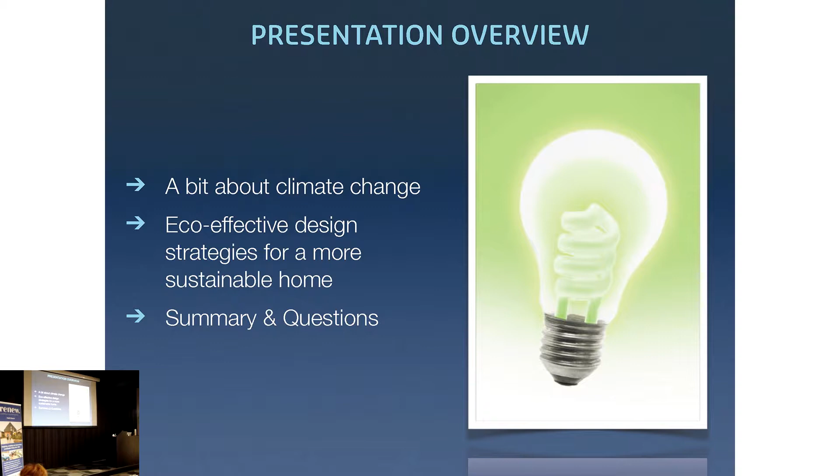Oh, microphone. Yeah, okay. This is like, I'm a man - I have to do two things with two different hands.

All right, this is everything you need to know about climate change in only 5 slides. Because we build really bad examples of this, we use too much of that, which then causes too much of this, which then does that, and then does this.

Here's a quote, a very brief history lesson: 'If our designs for private houses are to be correct, we must at the outset take note of the countries and the climates in which they are built.'

Does anyone know who said that? A famous architect - not that famous, no, kind of that famous. It was Marcus Vitruvius Pollio, who was a Roman architect. He wrote the oldest work that we have on the Western history of architecture, called the 10 Books of Architecture, and this, I think, was the opening paragraph of chapter 2 or something like that. So a lot of the stuff that Adrian and I will be talking about tonight isn't really anything new, and it's not really rocket science. It's just the stuff that we've maybe forgotten along the way, but if we go back to first principles and fundamentals, it can make a big difference to the way our houses perform in terms of their energy consumption and also in terms of their sustainability.

So these are the 6 eco-effective design principles that I've come up with over the years that I think cover most of the things that you need to do in order to get a more sustainable, more energy efficient build. It goes something a bit like this.

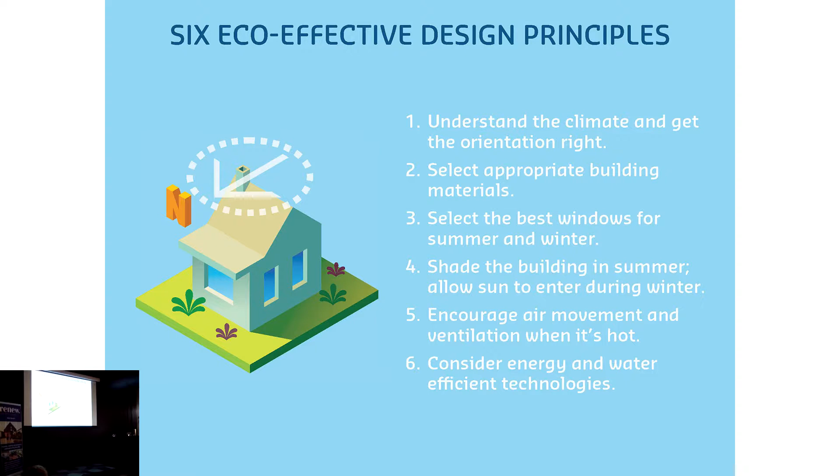Sometimes the best kind of technology is no technology at all. If you do the first five right, and you've got a bit of leftover money and other things you want to do to improve and optimize the build, then you can start looking at some of the add-on technologies and innovative stuff that's available, rather than starting with the technology and forgetting your first principles.

So let's get into number one: understand the climate and get the orientation right. Here's a map of Australia, published by the Australian Building Codes Board, which basically identifies the 8 climate zones that we are designing for within the Australian context.

Pretty simple: climate zone 1 is hot and humid. Climate zones 2, 3, and 4 are hot and dry, desert-like climates. Climate zone 5 is where most of the capital cities are located—a little bit hot, a little bit cold, so you have to design for both of those conditions. And then climate zones 6, 7, and 8 basically get colder and wetter.

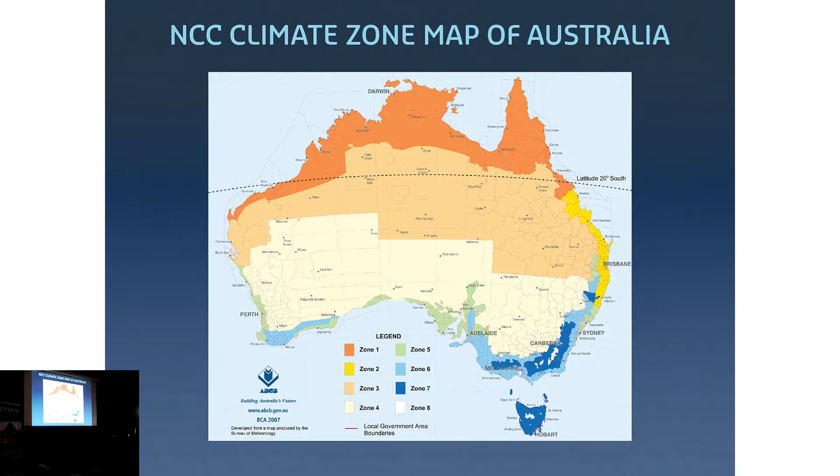Something I do when designing for a climate I'm not familiar with is this thing called a building bioclimatic chart. It was invented by a Hungarian architect in the late 50s, early 60s, based in the United States. Basically, it's a way of mapping the humidity and the temperature against the different passive design strategies that we can apply to a building.

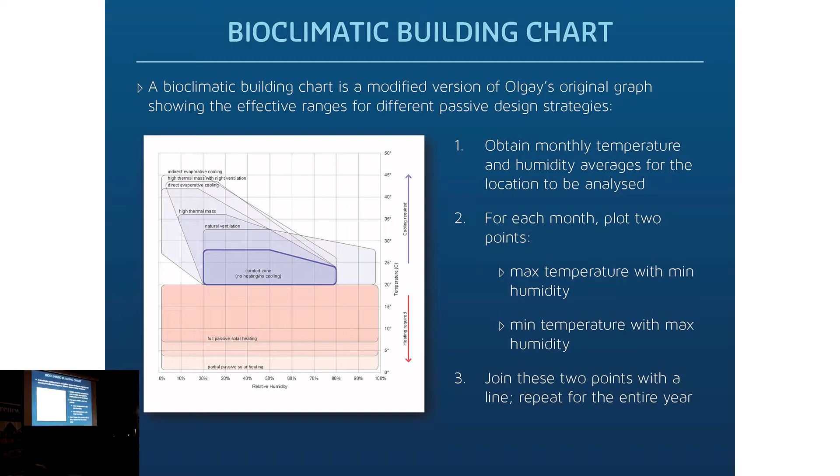It looks a little bit like this. That's the chart that Victor Olgyay came up with. On that chart, you map the monthly average temperature and humidity, minimums and maximums, and you draw two dots. You join them with a line, and that's the monthly trend for that particular period of the year. Then you repeat that another 11 times, and that gives you approximately what kind of climate you're dealing with.

Here's basically that building bioclimatic chart for Perth. You can see in the middle that wibbly-wobbly shape, and if you read it, it says comfort zone. So theoretically, when the humidity and temperature are within that middle blob, you should be comfortable. If your house is well designed, it shouldn't need artificial heating or cooling to maintain thermal comfort. As the temperature trends towards the bottom part, in red, that's when the building's going to get too cold.

We actually need to heat the building in order to maintain thermal comfort. For those of you familiar with Sanctuary and the kind of stuff we talk about, getting the sun into the building and using the sun to heat our building is the most energy efficient and free energy way in which we can heat our homes.

And then as the temperature gets hotter, you see we move up into the top part of those other wibbly wobbly shapes, and that's where we're trying to improve the cross ventilation, get more airflow, use thermal mass in order to stabilize the temperature. That's what a building bioclimatic chart tells you about the climate you're designing for.

I do a lot of work in Perth, so I don't need to look at this on a regular basis. But when I'm designing a building, say in Albany or a different region I'm not as familiar with, I'll start with something like this and get an understanding as to which of the design strategies are going to be most appropriate for that climate.

An interesting thing to note about this chart is if you look at the number of dots and how they're distributed, a lot of them fall in that bottom half, in that red band, which actually indicates there are more days of the year in Perth when it's too cold than when it's too hot. When I said that to clients and people at these talks, they go, 'oh really? But it was really hot in February.'

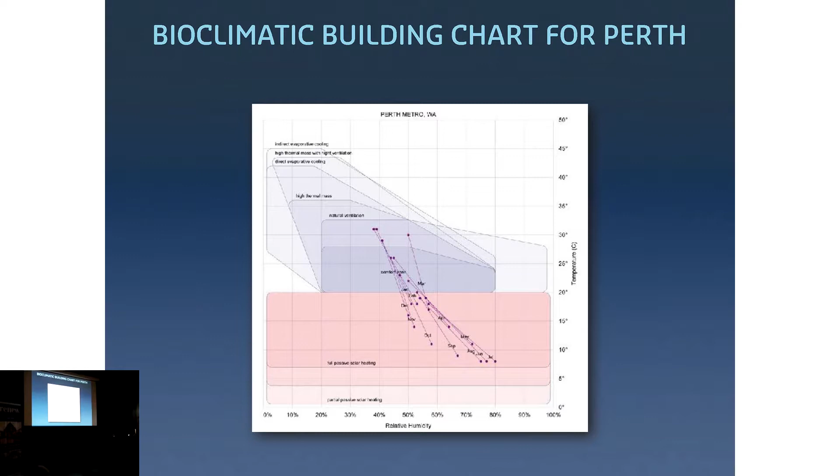Once we start understanding the climate and knowing what latitude and orientation we're designing for, we know where the sun's coming from, so we can get the orientation right. Here's a simple extrapolation of a box meant to look like a building. That glass is facing north, and down in the bottom left corner you can see the compass on the ground. This is what we call a sun path diagram, which tracks the position of the sun at different times and dates of the year, and you do a different one for different latitudes and longitudes.

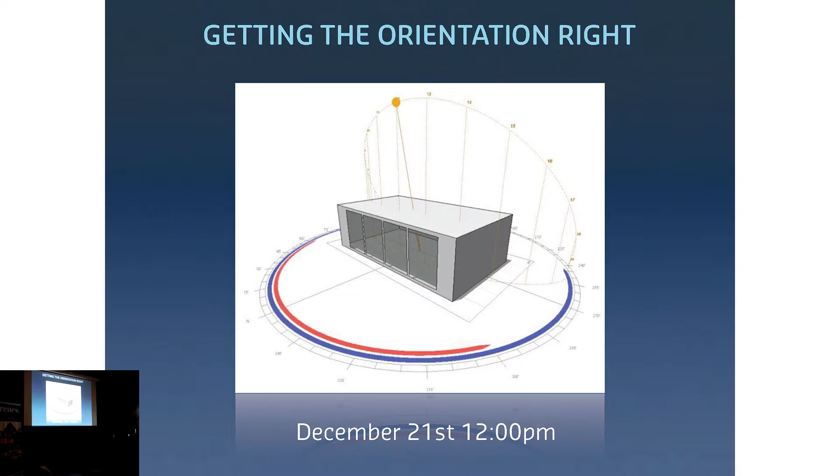What you can see here is December 21st. Anyone know what that day is? Summer solstice, the longest day of the year. So at 12 o'clock on the summer solstice, the sun is basically directly overhead. If you look at all that glazing on the north, not very much sun gets in through it, because the sun is high and overhead and the building is shading itself through the very shape of its own geometry. As we move through the year, we get to March 21st.

Anyone know what that is? Equinox. So the equinox is halfway between the solstices. The sun gets a little bit lower and you start getting more solar gain coming into the house, which is perfect at this time of year because that's when it's starting to get a little bit colder, and that's when we want to get solar gain inside the house.

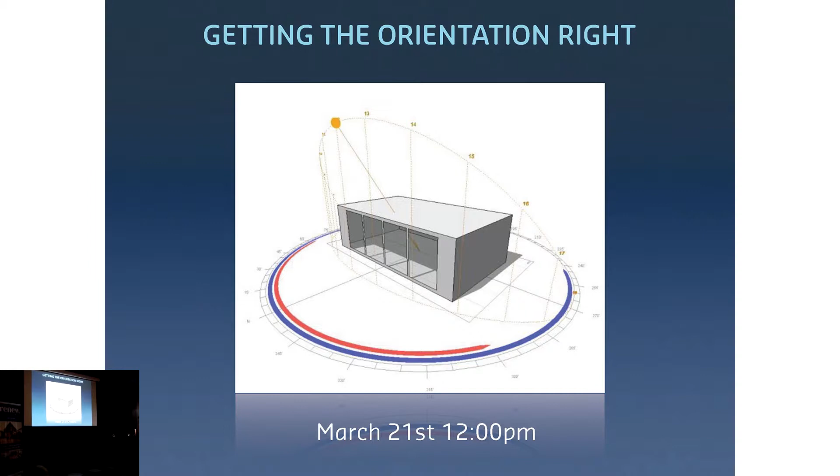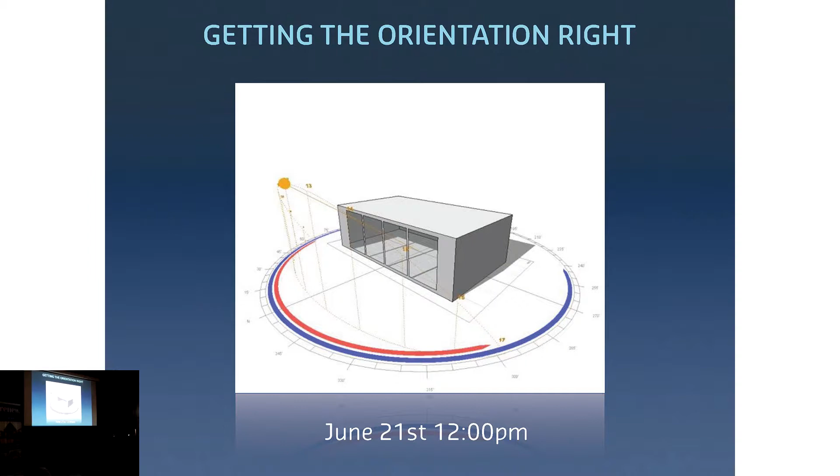Then we get to the winter solstice, June 21st. That's when the sun will be at its lowest point. That angle is about 34 degrees at 12 o'clock on the 21st of June, and that's when you get your maximum solar penetration into the building, so basically the sun is heating your building for free. Then back to September 21st, which is basically the same as March 21st, and then it repeats the following year. What we're trying to do here is what we call a direct gain passive heating strategy.

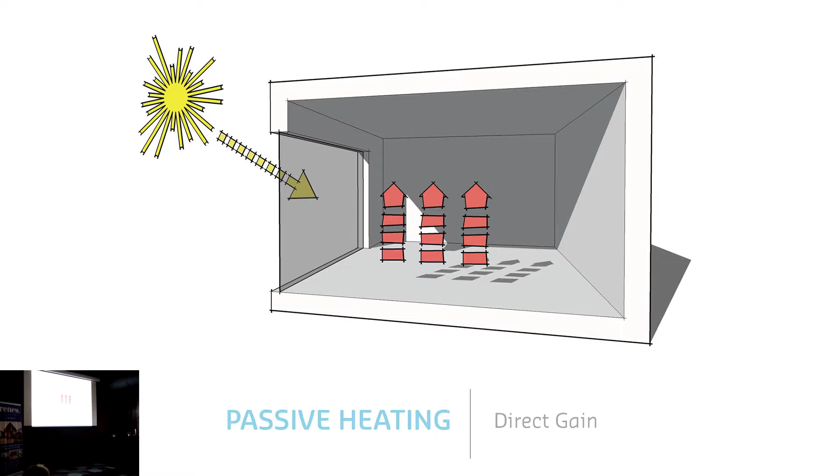The sun is a big burning ball of gas millions of kilometers away in space. It travels through the vacuum of space as shortwave radiation. Some of it passes through the Earth's atmosphere, some gets diffracted by clouds. When it hits the glazing of your building, that shortwave radiation turns into long-wave radiation, which is basically infrared, so that starts to heat up the space. That long-wave radiation can't pass back out through the glass, and that gives us our direct gain passive heating.

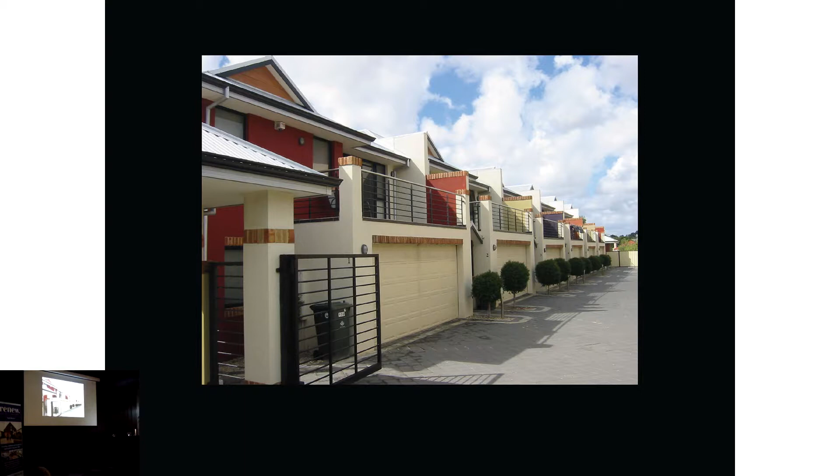I want to show you an example of a building I used to live across the road from in Leederville, where they thought about the orientation but didn't quite get it right. This is on Loftus Street, where I used to live across the road. They knocked down one of those houses that Adrian's currently renovating and built this series of townhouses, with a balcony and living space upstairs above the garage. Hard to tell from this photo, but all of those living spaces and balconies are facing south, which, if you've heard anything I've said in the last 3 minutes, is the exact opposite of what I've been talking about.

Why did they face it south? Well, that's because they wanted to take advantage of this very lovely view of the Perth city skyline that you get from that particular part of Leederville. Unfortunately, they get a view a bit more like this.

About 2 years after those houses were built, they built more townhouses on the south side of the block, but 3 stories high. Interestingly, they then faced all of their windows south and did exactly the same thing. See that little window in the top left-hand corner of each townhouse? That's the toilet, and I think the one next to it is the bathroom. So they didn't really think about the orientation.

And a couple of years ago, they've built more 3-story townhouses to the south of that one, and all of that lovely south-facing view is gone.

Interesting thing about our planning policies in Western Australia: there's nothing in the planning guidelines that protects your right to a view. However, there are policies that will protect your right to have access to the sun. So it pays to take advantage of the sun in any way you can.

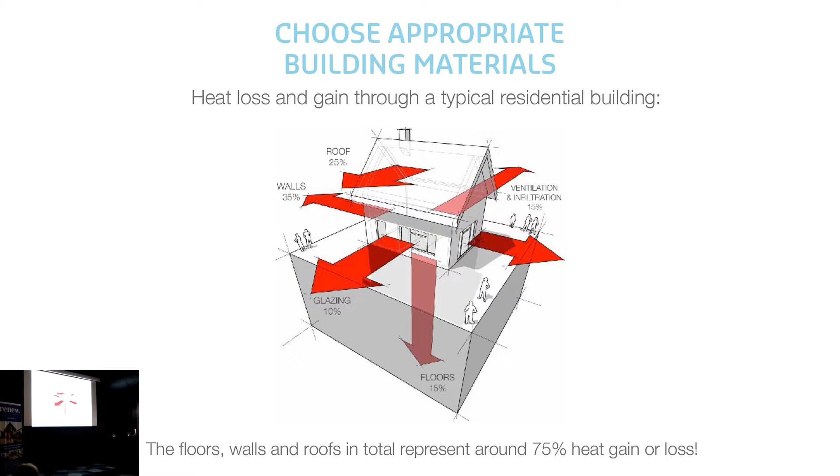Which brings us to building materials, and then I'll talk a bit more about insulation. When you look at the way heat flows in and out of a building, broken down by percentage - these are very rough - if you add up the floors, walls, and roofs, about 3/4 of your heat gain and heat loss occur through the building fabric, the building envelope. So it's really important that we choose the most appropriate materials to build with in order to minimize heat flow in summer and winter.

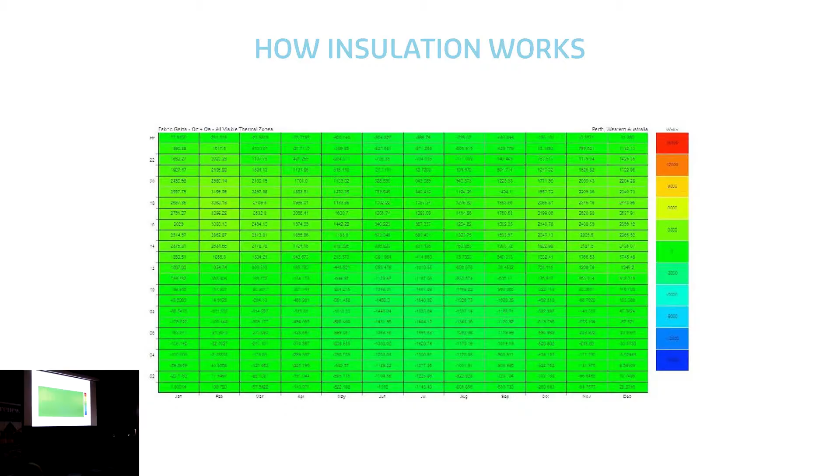Makes sense. There are 2 different types of insulation - technical terms - basically the fluffy stuff and the shiny stuff. The fluffy stuff is also known as bulk insulation, like glass wool, polyester, rock wool, or blow-in insulation. That works really well in winter.

The thing to remember is that insulation doesn't work if you squeeze it down to fit. So if you've got a wall that's 100 millimeters thick but your insulation batt's 150, you can't just squeeze more insulation in there and expect the building to perform better. When you squeeze all the air out, the insulation actually stops working, and heat flow occurs through the insulation material itself. It's the air trapped in the bulk insulation that makes it effective as an insulator.

Then there's the shiny stuff, which goes by all kinds of names: sarking, foil, double cell, anti-condensation blankets. This is really good for reflecting heat gain or heat loss via radiation, so it works really well in summer. However, the shiny stuff doesn't do its job properly unless there's a gap of air next to the side designed to reflect that radiation. So you don't want it to get dusty, and you don't want to sandwich it between 2 materials with no gap whatsoever, because otherwise it doesn't work.

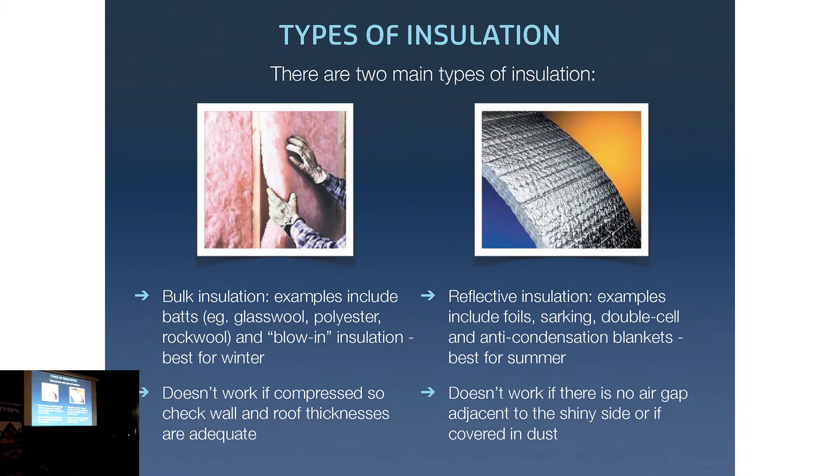The thing with insulation is that the more you put in, yes, that increases the R value, but it's not a linear relationship - if you put in twice as much insulation, you don't get twice the R value. It's actually a slightly diminishing return. So it's about optimizing the thickness of your wall so it doesn't end up too chunky, while also getting a good level of insulation.

Insulation needs to meet the following Australian standards. There's AS 4859, which describes the materials you can use for insulation, what goes into it, whether it needs to be fire retardant, all of that kind of very important stuff. And then there's AS 3999, which describes how the insulation has to be installed. If the insulation isn't installed correctly, it's not going to be able to do its job.

Here's an example of one that I prepared earlier. This is an example of a kind of bulk insulation, but this is a rigid board insulation. So basically this is polystyrene. Maybe if I hand that to this gentleman here, you can pass that around, try not to whack anyone in the head with it. Doesn't hurt though, it's all right.

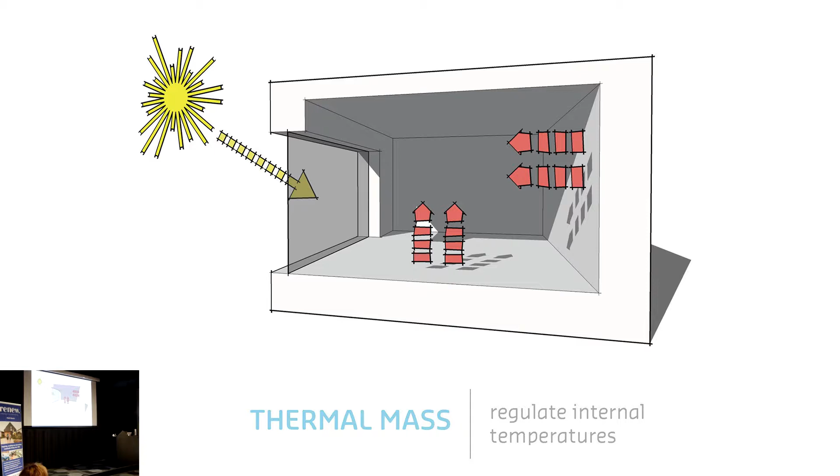And it also works in summer because it helps to regulate and keep the temperature more stable inside your building. Quick graph to show you how thermal mass works.

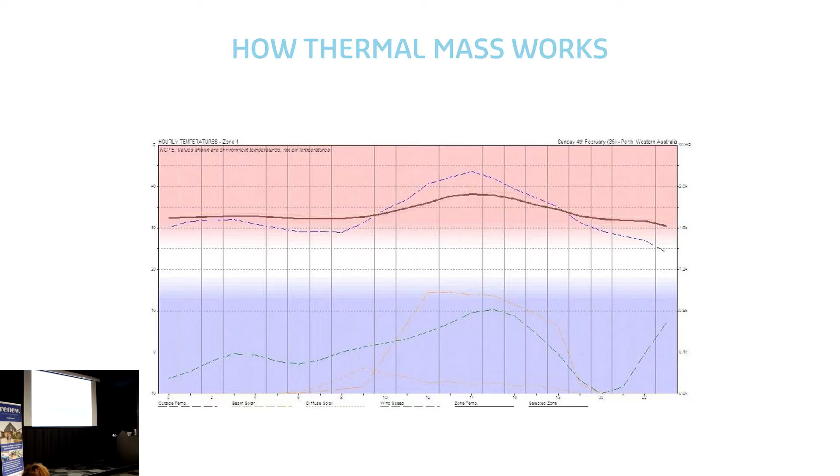It will look something a little bit more like this. So you get a more stable temperature. It doesn't peak as much as it does in the middle of the day, and it helps to keep that temperature at a more comfortable level.

We need to think about color as well when we talk about building materials. It's a bit like a car. The color of the car will affect how much solar radiation it absorbs.

Which is why most of the buildings I design have a surf mist roof, which is 0.31. So 69% of that solar radiation gets reflected, and only 31% of that gets absorbed. You can also get heat reflective paints and coatings. Bear in mind, they only work if they're kept clean and dust-free.

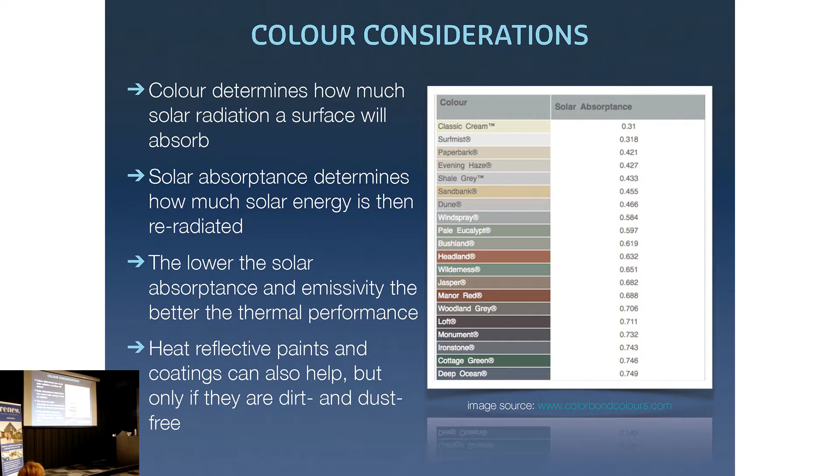Just to show you a little bit more, as I said, I'm a bit of a weird architect. I like spreadsheets and graphs.

So changing the color of your roofing material doesn't usually change the cost of your building, but it will make a dramatic improvement to the performance of your building. If you have air conditioning in your building, it doesn't have to work as hard because it doesn't have to remove as much heat energy from the building.

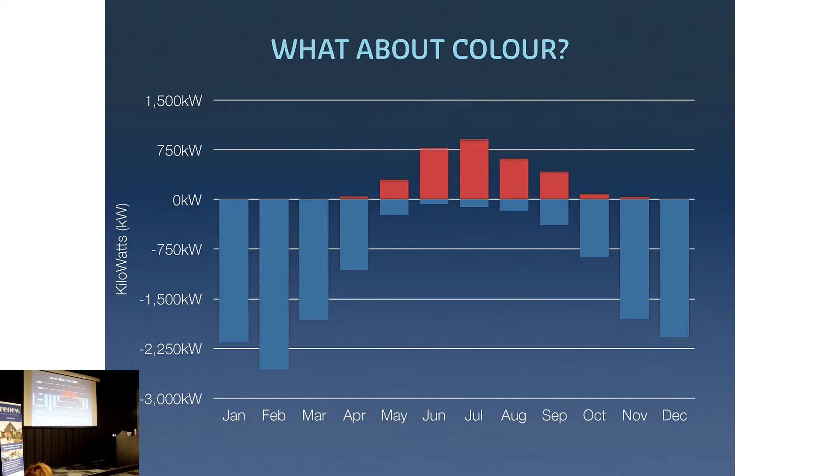The more astute of you may have noticed that going from a dark colored roof to a light colored roof actually increases the amount of energy you need in winter for heating, because it's reflecting more heat. However, the net gain for the heat that you don't get now with a light colored roof, compared to a dark colored roof, more than offsets the winter detrimental performance. So it's much better in summer for a small detriment in performance in winter.

So just to summarize building materials, when you're selecting them, you're trying to use a combination of the shiny stuff and the fluffy stuff in order to insulate your building to cater for both summer and winter conditions.

You want to incorporate thermal mass in the floor and keep that thermal mass exposed. Like we do a lot of buildings with concrete slab on ground, which is great for thermal mass, but if you cover it with carpet or wooden floorboards, that thermal mass is then insulated, so it can't actually work to its optimum advantage.

You might want to consider a material which has thermal mass on the inside and insulation on the outside. You may be familiar with this way of building a wall called reverse brick veneer. I have 2 clients in the room that are very familiar with it, and I didn't do a very good job of explaining to them that I wasn't designing a reverse brick veneer house for them. But they've been very, very accommodating, so thank you.

Basically, that means putting brick on the inside, a frame on the outside, insulate the frame, and then the thermal mass regulates the internal temperature, does that lovely solar gain thing, and the insulation on the outside protects it from the extreme temperature outside. That allows you to optimize the performance of your building.

Light-colored materials on the outside work best, and then you might consider heat-reflective paints for your roof. Just a really little simple tip.

Basically, builders have been building cavity brick houses in Perth since the dawn of time, and it's what they've always done. Why do we need to change anything? Because that's the way it's always been, and everything's fine.

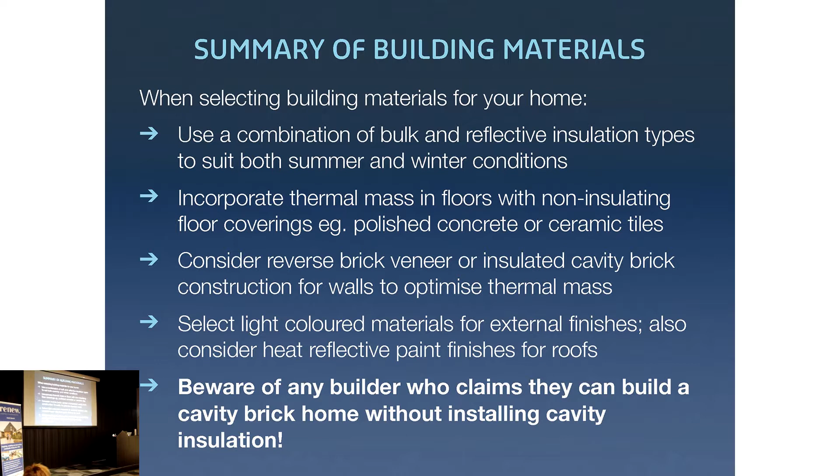I'm not going to talk too much about windows because that's Adrian, but basically windows are a very important part of the building. There are three ways heat transfers through a window: radiation, convection, and conduction. It therefore means that windows and the way you select and specify them is critical to the performance of your building because there are so many different ways heat can flow in and out.

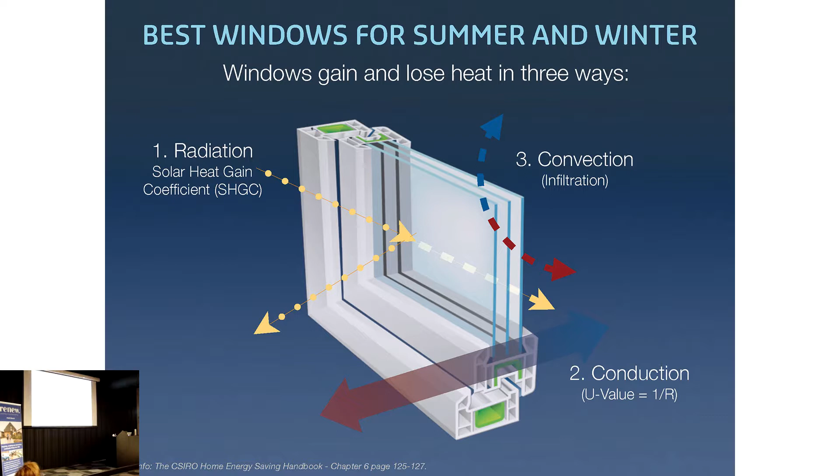Sometimes you want the heat to flow through the window to heat your building. A lot of the time you don't want that heat to flow back out because you're trying to keep the warmth inside. And sometimes you're trying to keep the heat out.

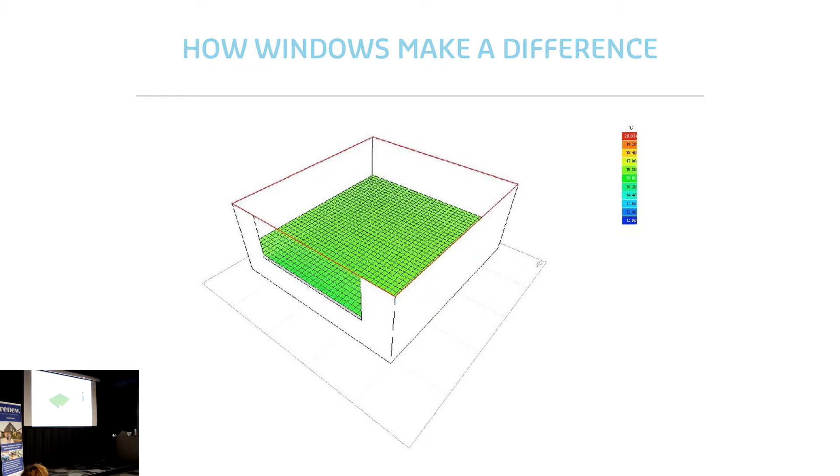If we just put in a better quality window, double glazed with a better frame, you see not only does the temperature increase a few degrees, it actually becomes more stable. So just by tweaking the windows, you can make a big difference to the performance of your building. It's also the bit that can get very expensive, as Adrian will talk more about. It's about selecting the best quality windows for your budget, not making them too big, and putting them where they need to be. All of those things can really influence the performance of your building.

I'm going a little bit over time. Is that all right? Okay, I don't want to steal your thunder, Adrian.

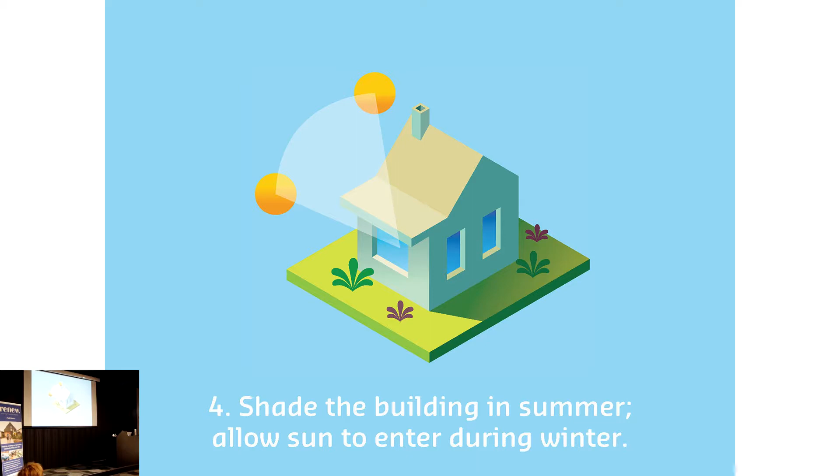Okay, so now we move on to shading. We're trying to keep the sun out of the building in summer, but we want that sun to enter the building in winter. Really, the simplest way to do that is to put a hat on our building, just like how we have to put hats on when we go out in the playground these days. You want to do exactly the same thing with your building.

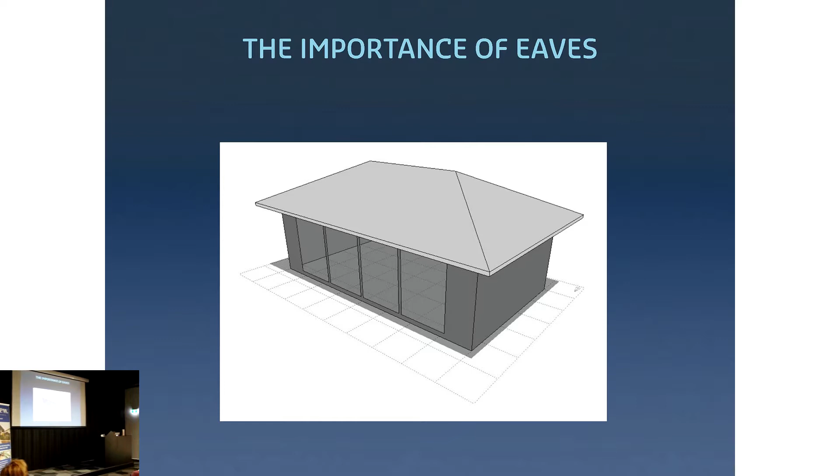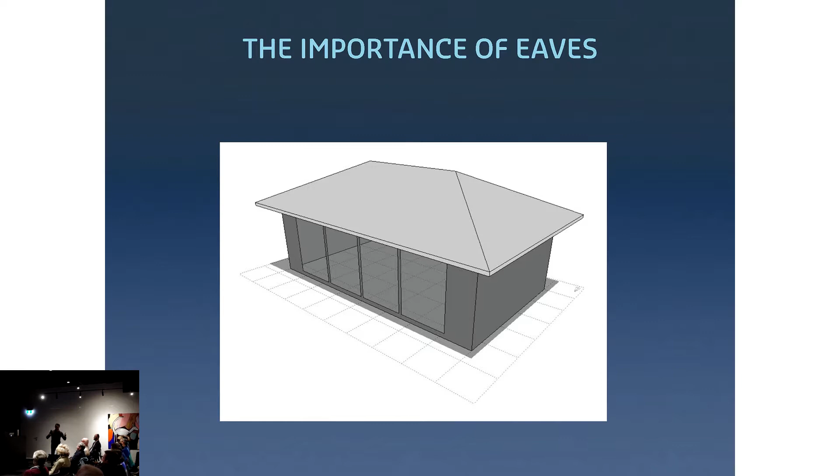This is basically because they've got houses they're trying to build with bigger floor areas, but the lots are getting smaller and smaller. So what they do is box out the eaves, building what used to be the outside overhang into the building itself, and you end up with something that looks a bit like this.

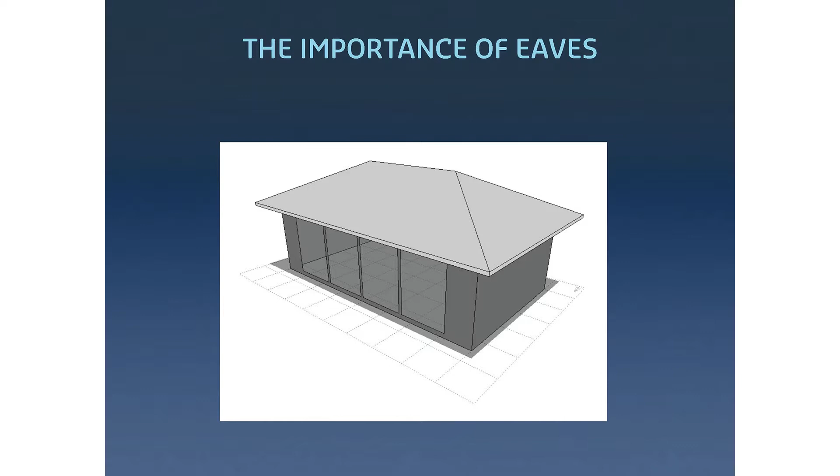There are lots of other ways to shade a building too - you can put in louvers, screens, timber slatting, awnings, you name it. But eaves are the easiest way, and it doesn't really cost anything to do it. I'm an architect and I design buildings without eaves too because they look cool, so it's about balancing and understanding the impact that has on the performance of the building.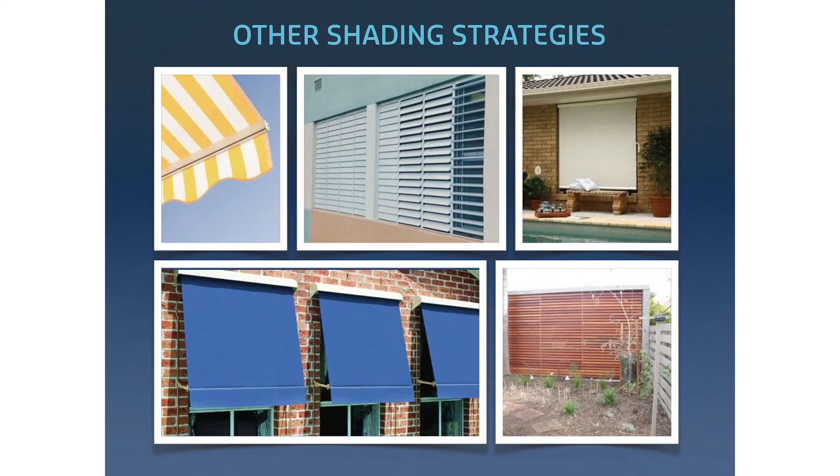Second last eco-design principle is encouraging air movement and ventilation when it's hot. We want to get air flowing through the building because it's basically free air conditioning - we don't have to use mechanical cooling in order to cool down the building.

Windows have all these different kinds of opening types - sliding windows, casement windows, louver windows - and they've all got different percentages of opening, which reflects how much air can move in and out of those windows.

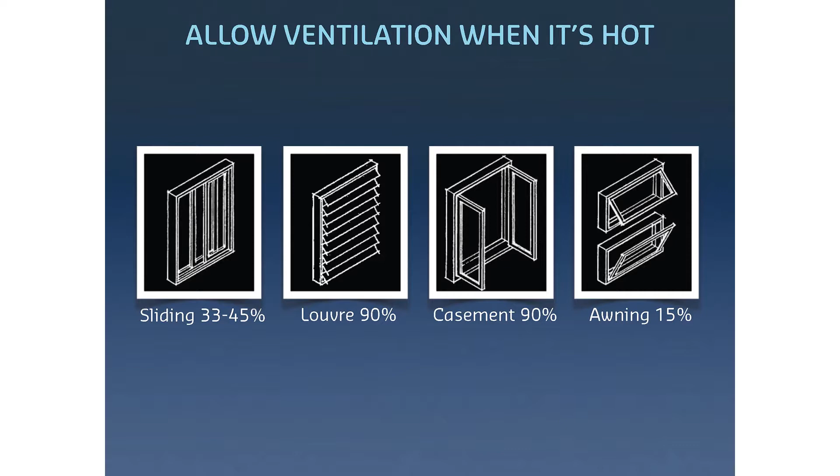We used to use a lot of sliding windows, which provide a decent amount of ventilation. What you're seeing more and more of are these windows here on the far end called awning windows. They're hinged at the top, only open at the bottom, and you can do big bits of glass with them, and they're pretty cheap and easy to install, and builders love them, but they're actually not very good from a ventilation point of view.

Because it's only opened at the bottom, when the wind comes along and hits that glass, it doesn't go through the window - it actually deflects up and goes away from your window, with very minimal air coming underneath. The wind hitting the glass doesn't redirect itself to ventilate the room - it basically just gets deflected from your building.

The other reason why awning windows get used a lot is because we don't want little kids falling out of windows, because that's a bad thing. So on upper story, two-story buildings, we put these windows in with a restricted opening at the bottom to stop kids from falling out.

Which is a legal requirement. I don't mean to make fun of the fact that kids shouldn't fall out of windows, but there are other ways in which you can make windows ventilate well and also be safe and make sure kids don't fall out of them. So awning windows can be used in some circumstances, but they're not really the best window for ventilation purposes, in my humble opinion.

Adding ceiling fans is always a good thing too.

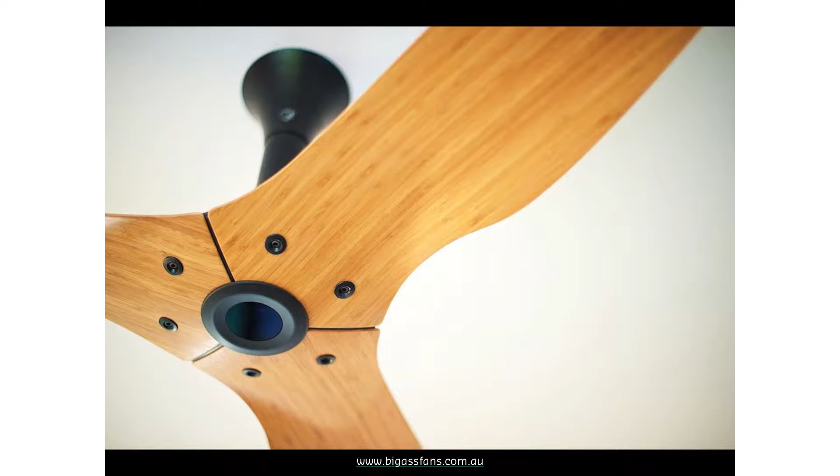We're at home base - I do believe Big Ass Fans have got a display downstairs. There's a funny story about why they're called Big Ass Fans. I can tell you later during the break.

Ceiling fans are a very economical and cost-effective way to cool a room or a space. I believe the statistics show that if you have a ceiling fan in a room turning on a hot day, you'll feel something like 5 degrees cooler, possibly even up to 10 degrees cooler, just because of the air that circulates and increases the rate of evaporation from your skin.

What we're trying to do with ventilation is use it with that thermal mass design strategy I talked about under building materials. Thermal mass traps and retains heat, which is good in winter but can be a disadvantage in summer. That's the problem we have with a lot of houses in Perth, because we build concrete slab on ground, cavity brick, lots of thermal mass, but then we close up the house during the day in summer, then we get home and go, oh, it's hot in here, then we turn the air conditioning on for the next 18 hours in order to cool our building down.

Whereas what you want to do is have windows that you can open, catch that lovely southwesterly Fremantle Doctor breeze, and flush that hot air out. It resets the thermal mass, and then the next day comes, and it can start absorbing and regulating that temperature again.

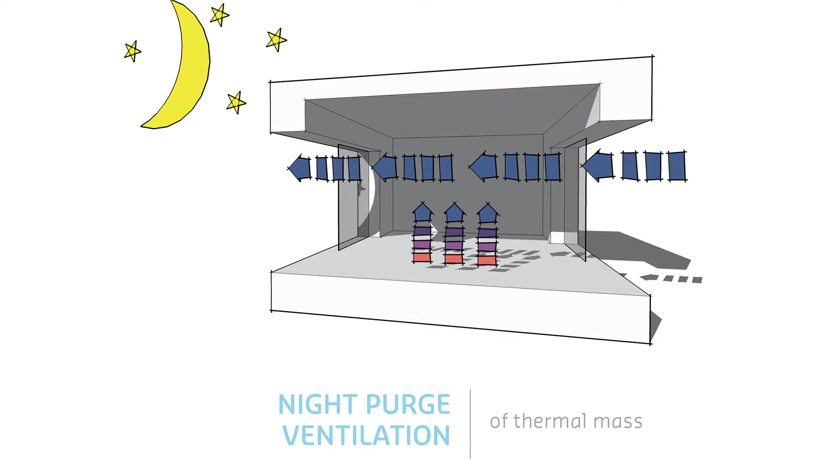That's called night purge ventilation of thermal mass. It works with your thermal mass in your building. Draft proofing your building, making sure you don't have any drafts or leaks, basically stops air from transferring heat into and out of your building. You tend to notice the effect of this more in winter rather than in summer, but also in summer, if your building's not airtight, then heat's getting into your building and causing it to warm up unnecessarily.

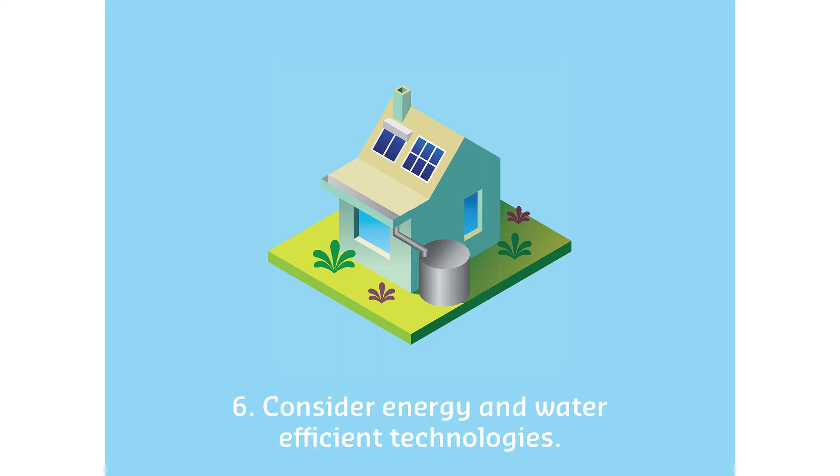Okay, and that brings us to the last section, which is consider energy and water efficient technologies. I'll fly through this because a lot of you will know this being Renew members. Solar PV, it's a no-brainer. Basically, you'll get a payback within 5 years, generally speaking. So that's a really smart and easy thing to do. Lots of people know more about solar PV than I can tell you.

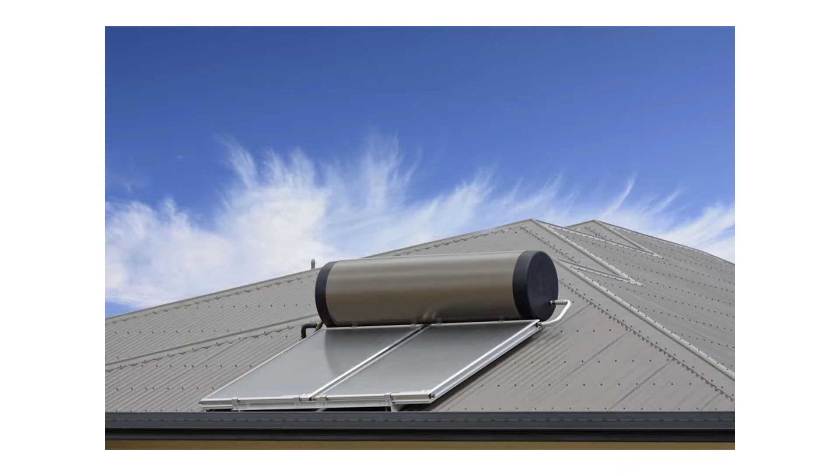Looking at the way you heat your water, that's another big user of energy inside buildings. So you might want to look at solar hot water, heat pumps. All of those will help to reduce your carbon and energy footprint. Knowing how you're using your energy is kind of the first step in order to optimize and improve your energy efficiency. So nowadays you can get these energy monitoring programs on your iPad and on your phone.

I can turn the lights on in my apartment from my phone these days. If you understand where the energy is being used, then you know where it is that you can optimize and save.

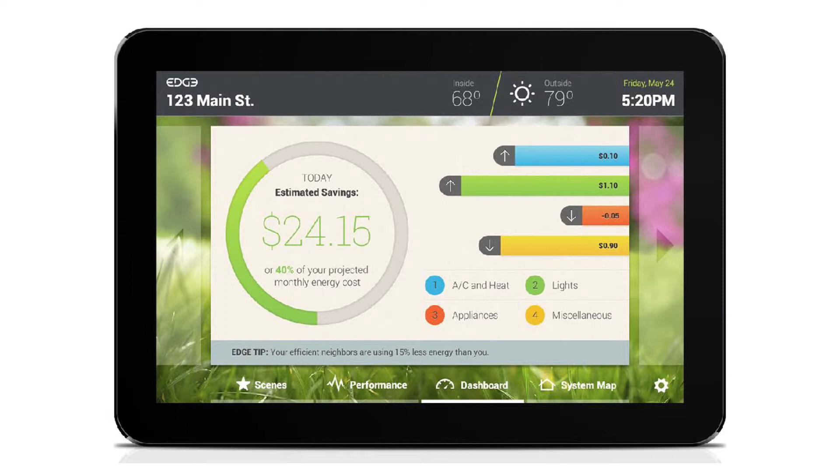Light switches are a good idea because they let you turn your lights on and off. The reason I put this light switch in my apartment, I've got a switch by my front door, which is a master switch. So when I flick that and go out, it turns off all the lights in my house. I don't have to go through and turn off all the lights. And if you live in a bigger house, that's a really easy thing for an electrician to wire in for you. It costs a couple hundred dollars, and you can basically minimize your energy use through a very simple wiring configuration.

Energy efficient lighting, LEDs. Basically, I think all lighting these days is some form of LED. The thing to remember is that heat is what destroys an LED, so you need to make sure that it's ventilated properly.

As an architect, we like to do a lot of recessed downlights. The problem with recessed downlights is that creates a hole in your ceiling, and that hole means you can't really insulate all the way around it. Then the air escapes through it and makes our building less energy efficient. You can get downlights now that are specially designed for fire safety, where you can run the insulation over the top of the downlights, so you want to look for those when choosing and specifying your lighting.

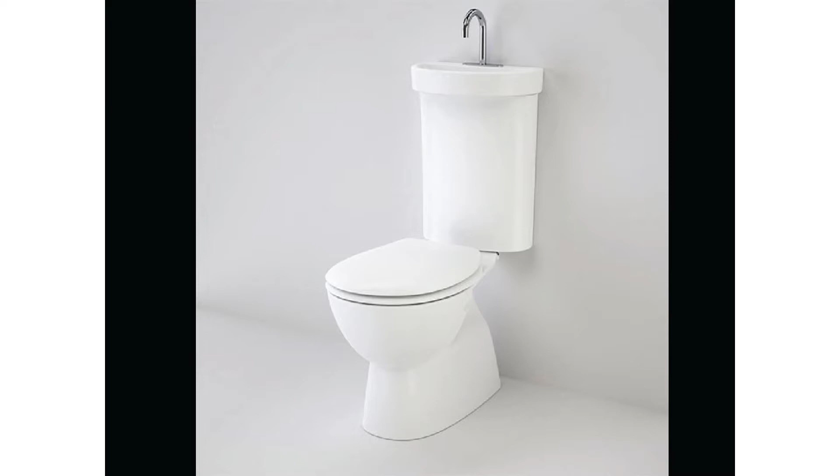And then I'm sure you've seen toilets like this. I have one in my second bathroom, where basically you can do your business, and then when you flush, the water that comes through the tap fills the cistern, you wash your hands, and that is what's stored for the next flush. Just to be clear, you're not washing your hands with dirty toilet water.

And everyone loves electric vehicles, and that's probably going to become the norm in the next 10 years or so. I don't really need to tell you any more about that.

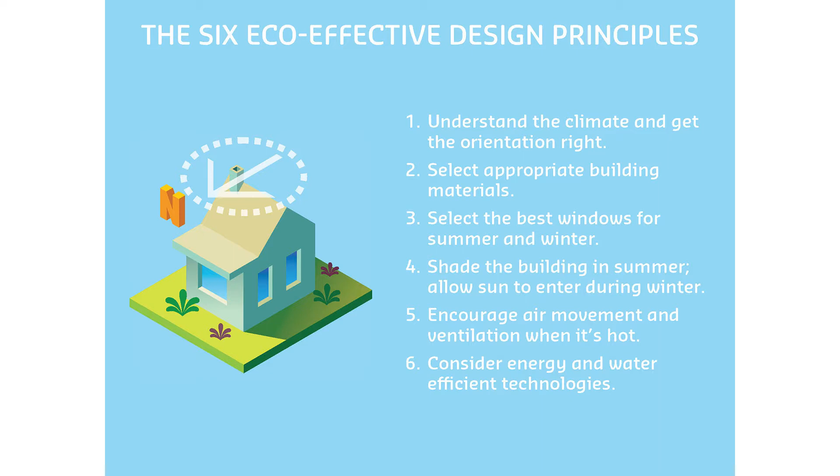So that summarizes the 6 eco-effective design principles. I do believe you can get a copy of the presentation, so hopefully there's something useful in that. I've got one more slide. Here's some free stuff, some stuff you already know about.

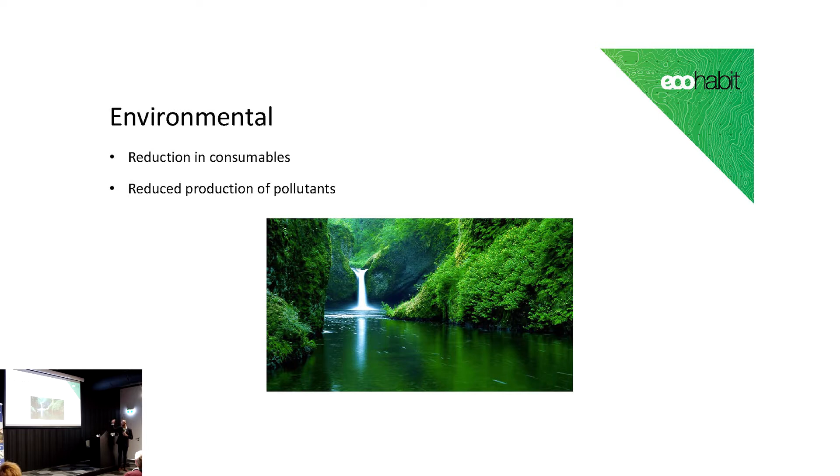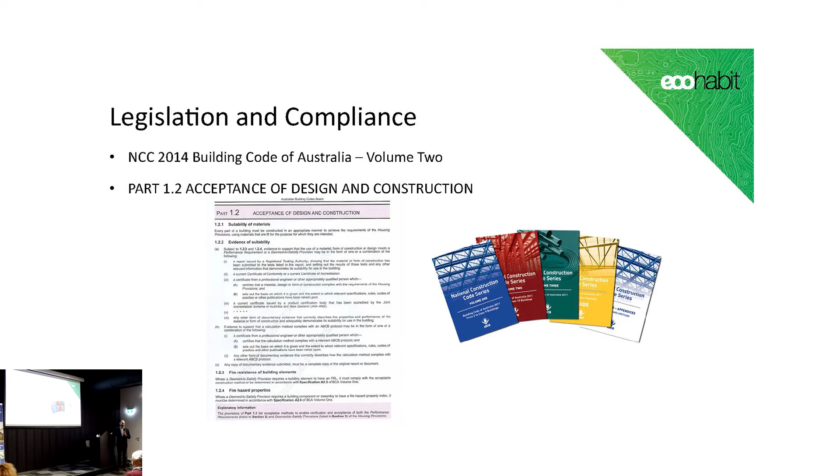There's a variety of different reasons, obviously environmental reasons. Climate change is a big one, we all know, so we should be doing it for the climate. The National Construction Code tells us that we need to meet a 6-star rating. I've got a bee in my bonnet about the 6-star rating - I don't think it goes anywhere near far enough to what we need to do, and it's an average, so it's pretty useless really. But anyway, we need to comply with it.

Mandatory disclosure is something that's been supposed to be coming in for a very long time, and it means that when you go to sell your house, you have to have it assessed and it'll get a star rating. We have to do it for commercial buildings, but for residential we don't have to do it yet. Something to consider - maybe one day it might come in.

This is the key one for me: if you design an energy efficient home for yourself, you'll get the benefit from it. Everyone gets the benefit from it. So you don't need to go over the top - you just need to think about what you need for yourself.

If I go back about 15 years ago, we were designing a rammed earth house up in the hills for a client, and they wanted to achieve an 8-star rating, which was pushing it - I think it was only maybe 4 or 5-star back then. So we were going a long way past the minimum standard. Now, they had views to the south, and they were using rammed earth, which doesn't perform very well unless you insulate it. Everything was wrong about this house in terms of doing an energy efficient house.

During conversation, we were putting double glazing and all sorts of things into this house to make it perform, and the cost was going up and up and up. Then one day they said something about loving the outdoors, and I said, well, what's that mean? So, when it's cold, we open doors and windows, we love the cold. What about when it's hot? Yeah, we just open doors and windows. So what are we putting all this expensive double glazing and other things into your house for, when your lifestyle doesn't dictate that that's the way you're going to operate in this house?

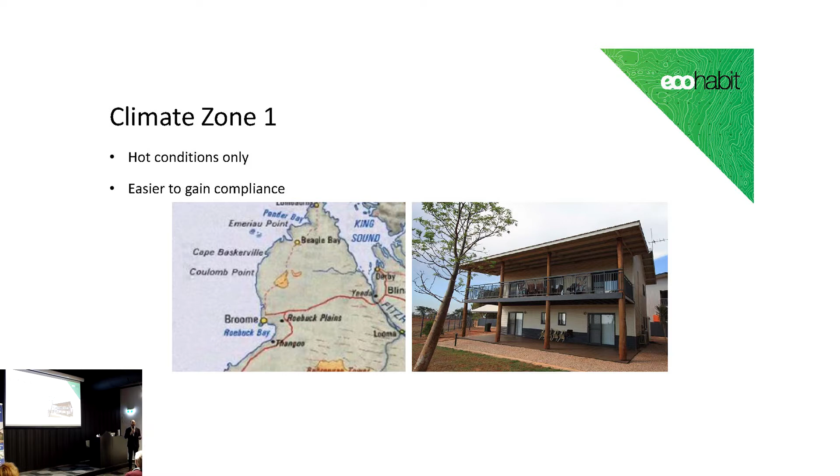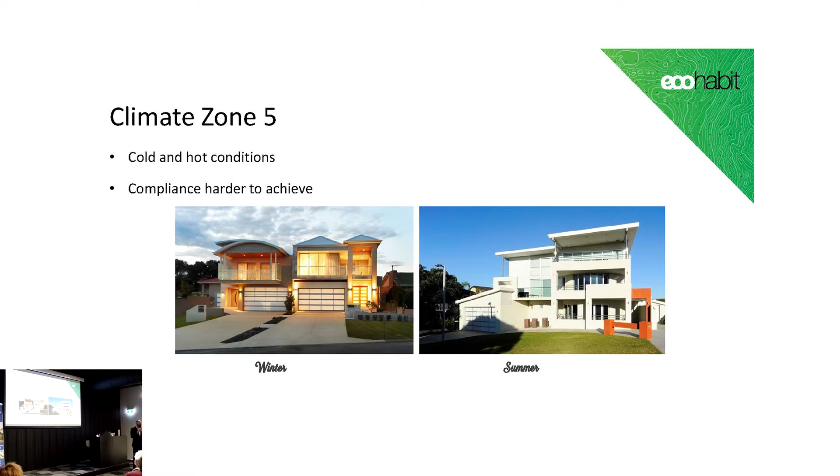Okay, so how do we assess a home? Sid touched on this a little bit. You've got this climate map, and down in Perth we're in climate zone 5. If you're up in Broome, you'd be climate zone 1, which is generally a hot climate, and it's pretty easy to contend with a single type of climate zone like that. You make sure you deal with ventilation, you make sure you keep the heat out. It's pretty simple really. When you come down into Perth, we've got a pretty severe winter and a pretty hot summer, so we can get 40, 45 degree summer days, and we can get down to 1s and 2s in winter sometimes as well. So it's really important that we deal for both of those climate conditions.

When you go along to a builder typically, or a lot of designers, the way they assess your home, they'll assess against the National Construction Code for the 6-star rating. It's a blanket approach. Your living rooms could be performing at 2-star, your bedrooms are all performing at 8-star, your average is above 6-star, but the space that you spend most of your time in, your living areas, is poorly performing. So the National Construction Code falls well short.

When we assess a home, we've got a totally different approach. When we send our design off to an assessor, the assessor that we use, we stipulate glazing, frame types, etc., wall types, and so on. Then they come back with this graph.

We can see each individual room, we can see the star rating of each of those individual rooms. We can see that the study is only a 2.7 right down the bottom right there. Right in the middle there, bedroom 3 is performing pretty well, and so is bedroom 2 at 8.3. But the more important things are the heating and cooling loads. We can see exactly how those rooms are performing. We can say, well, we know that bedroom 3 and 2 are perfect, so why is the study not performing? Generally it's a glazing issue, 9 times out of 10 it's a glazing issue - windows pointing the wrong way or something like that, or not shaded properly.

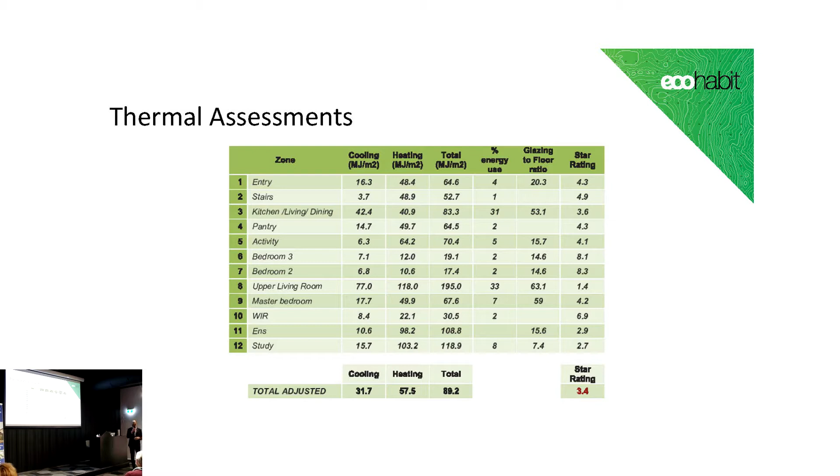So controlling heat loss and heat gain - a little bit of science here. I'll try and whiz through this and try and keep you awake. I've got no jokes, so I'm not as funny as Sid, so hopefully we can keep you going. So heat transfer - as Sid pointed out, conduction. Conduction happens in solids, it's the vibrating of atoms through a solid, heat transfers through the solid in that manner. Convection happens in liquids and gases, caused by the movement due to a substance becoming buoyant. And then you've got radiation, and Sid talked about radiation, how radiation works from the sun.

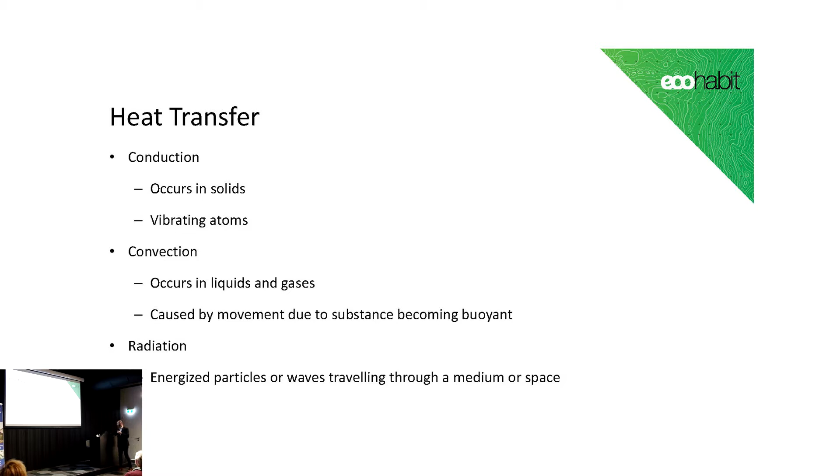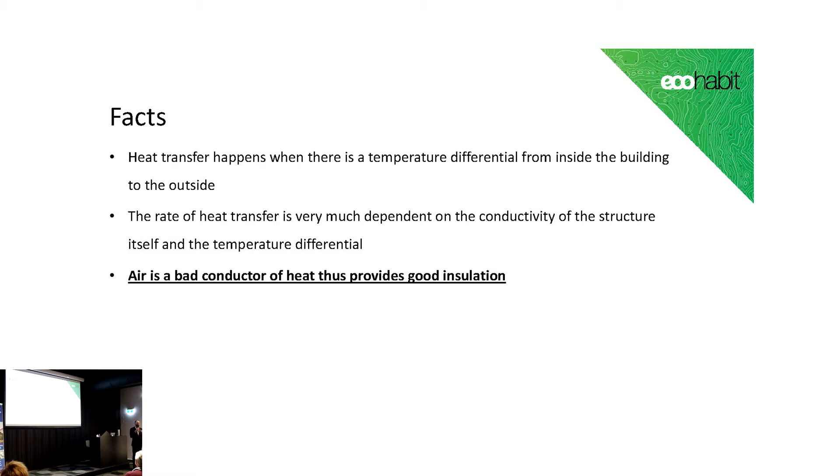So a couple of facts. Heat transfer happens when there is a temperature differential from inside the building to outside the building. Nice and warm in here, it's cold outside, single glass here, all the heat's escaping out through that window. The rate of heat transfer is very much dependent on the conductivity of the structure itself and the temperature differential. Air is a bad conductor of heat, thus provides good insulation. If you remember anything from that slide, that line is the most important one.

So Sid touched on R values as well. Now, an R value is the ratio of temperature difference across the material. K is a conduction coefficient, that's a standard. D is the thickness of the material. D divided by the coefficient for that particular material will give you the R value. So down the bottom there, higher the R value, better the insulation, slower the heat transfer. Again, just remember that line.

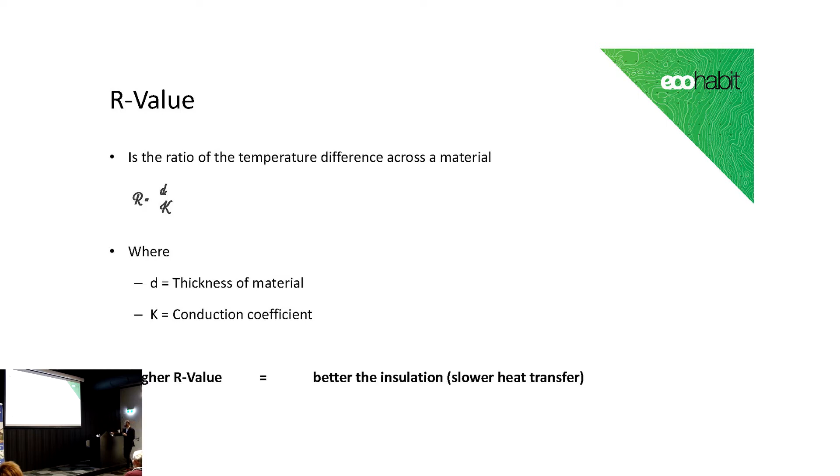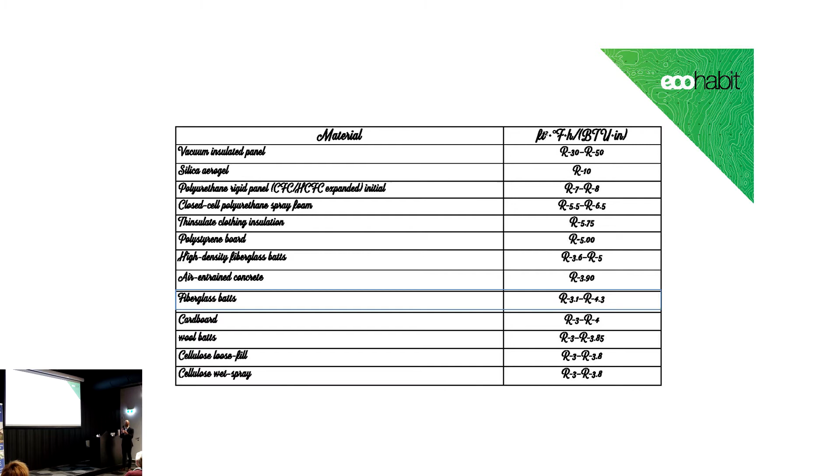So this is a standard graph, and if you Google insulation graphs and tables, all this sort of stuff comes up, there's heaps of it. Fiberglass batts gives you an R value of 3.1, 4.3. Snow, if you could hold it cold, gives you an R value of 1. Brick gives you an R value of 0.2. Glass, 0.14. So your brick, a single leaf of brick, is only performing slightly better than a single pane of glass. The only reason double brick even comes close to being a performance wall system is because of the insulation, the air cavity in the middle. The problem with that is that we connect the leaves of brickwork with metal wire ties which conduct heat and energy. So, not a good system.

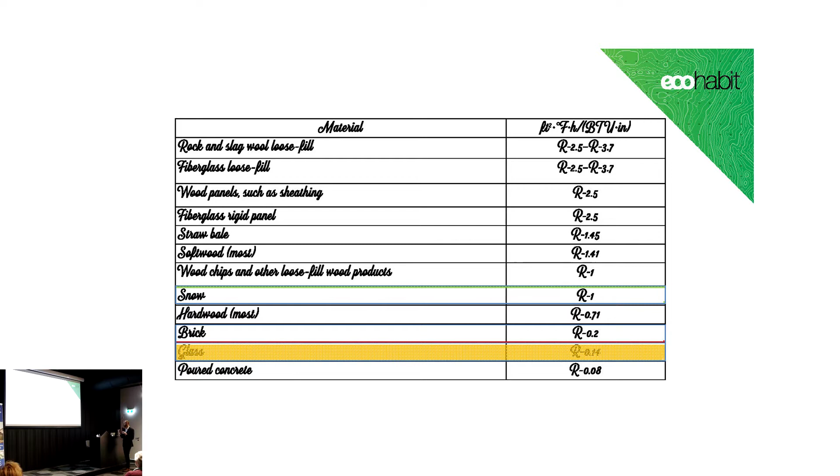Then if we start moving on to glass - U values describe how well a building element conducts heat. It's the inverse to R value, where K is again the coefficient for that material, and L is the thickness of the material. Now, the smaller the U value, the better at reducing heat transfer.

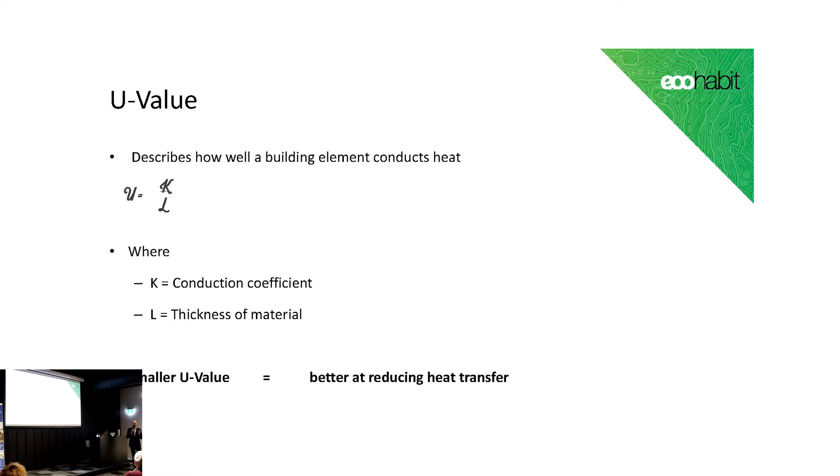So if we go down to the bottom there, we look at a single pane of glass, 1.2, and then a double pane of glass, 0.7. So we're looking for low numbers. When we're talking about glazing and U values, we're looking for low numbers.

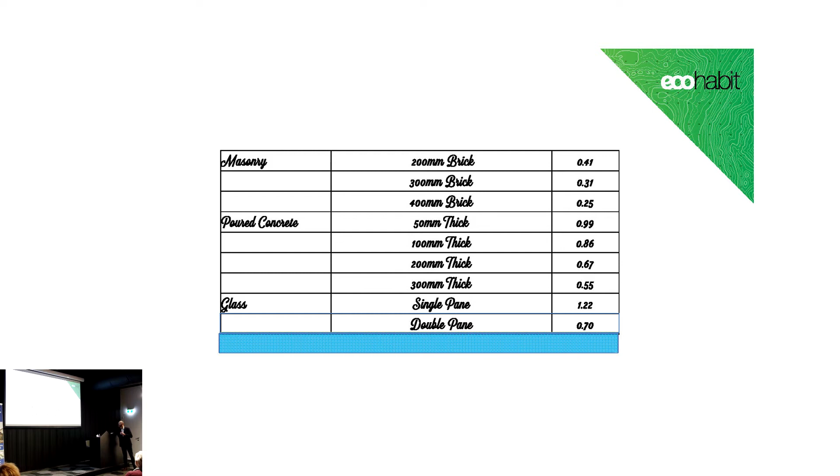So controlling heat loss and heat gain, we need to focus on the weakest link. So when we think of a building fabric, think of an esky. It kind of follows passive house principles. You've got an internal skin, an external skin, and an insulator in between, with no thermal bridge in between it.

But we need to get into that esky, so we stick a door in it. Then we want a bit of sunlight into it, so we stick some windows in it. So we create a leak in our building, a hole where heat can come in and out of the building.

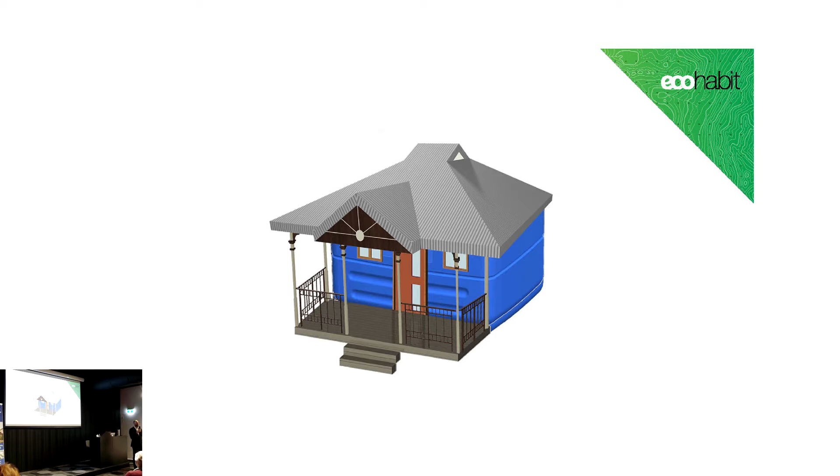A lot of the times when we look at homes, and Sid will attest to this, you look in the newspaper and you'll see a home that's supposed to be solar passive design, with this great living area and beautiful glazing, and then they stick an al fresco roof over it, and no winter sunlight comes into it. So it's kind of what we're doing here. The weakest link is glazing.

So Sid's touched on conduction and radiation. There's a couple of other things to consider with glazing as well. We've got convection, which happens when warm air comes in contact with a cold element. If you've got single glazing and you're trying to heat up a room, and the warm air touches that glass, it cools rapidly and drops. So if you've ever sat in a room that's actually pretty well sealed up and airtight, and you feel a draft and you're wondering where it's coming from, and you're sticking towels in your door and you still feel it - quite possibly it's the warm air touching the glass and dropping, creating that convection current.

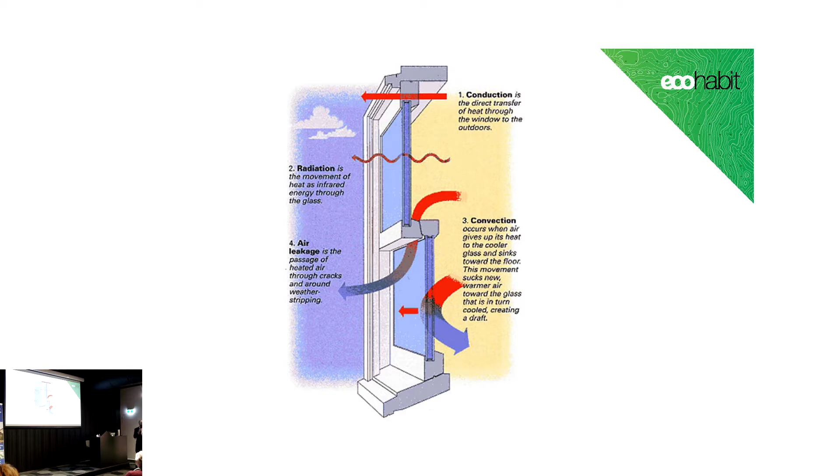Air leakage is another thing to consider as well, but we'll focus on conduction and radiation here. So we talked about U values before - the lower the number, the better at reducing heat transfer. The other thing you've probably heard of is solar heat gain coefficient, which is the proportion of total solar radiation transferred through the glass at normal incidence. Again, remember: the lower the number, the better the solar performance.

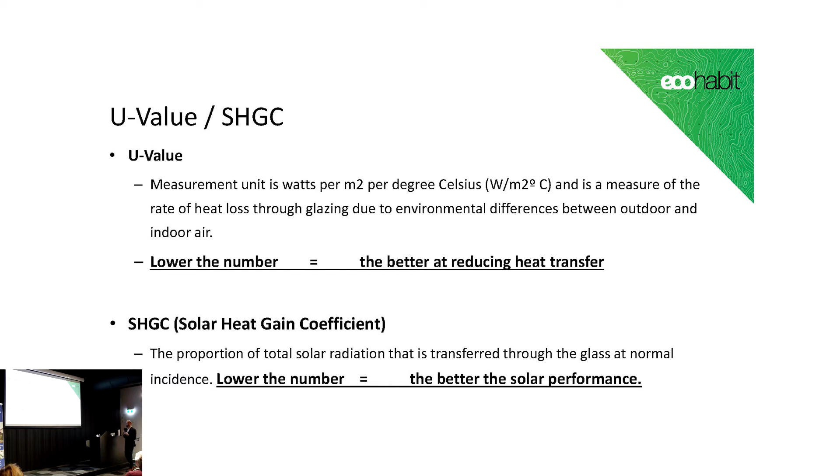So when we talk about insulation, we want big numbers - R4, R5, great. But for windows, U values and solar heat gain, we want little numbers.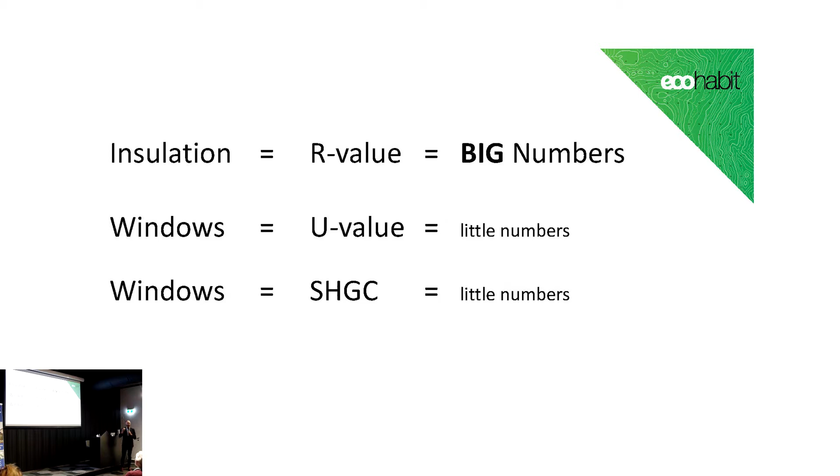So when we talk about locating our glass on our building - these days I push for double glazing throughout the whole building. I think it's a no-brainer. If you're going to spend any money anywhere on your house, spend it on your glazing, put double glazing in. There's not a house that I've done in the last 4 or 5 years where we haven't double glazed it. So it can be affordable.

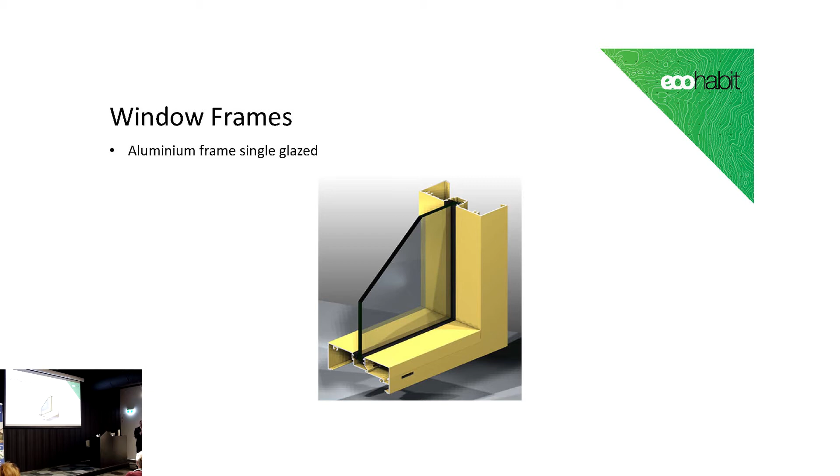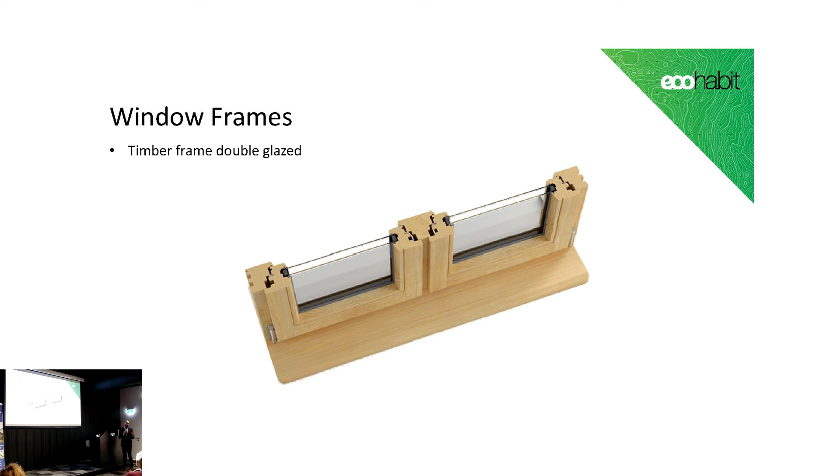Timber frames - timber's pretty good. It's not the perfect insulator, but it's certainly better than an aluminium frame that's not thermally broken. And if you double glaze a timber frame, it's not a bad system. The quality of timber frames you get these days, they seal up pretty good, so we have put them in some of the houses we design.

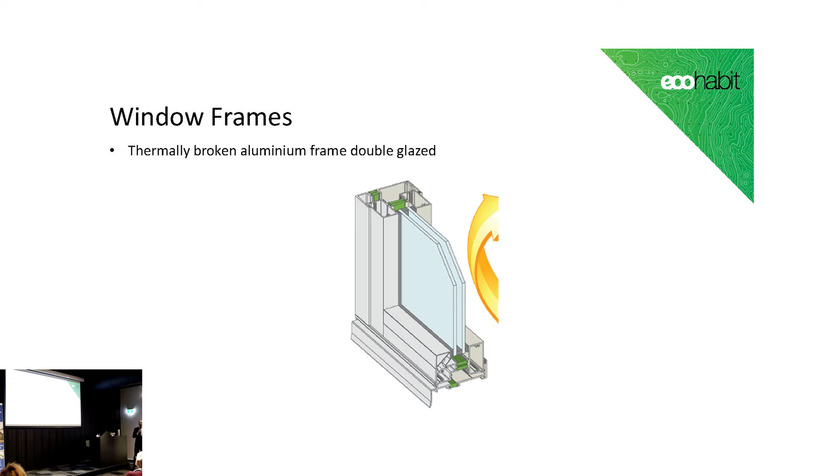Aluminium thermally broken window frames are certainly near the top of the list, along with UPVC - undoubtedly these are the two systems you should be looking at. Now, I love to promote local products, but I've got to say we can import thermally broken aluminium double glazed window frames for the same price you can get unbroken aluminium window frames. The amount of heat transfer you get through a window frame is quite incredible. So double glazing without a thermally broken frame or a UPVC frame is probably only going halfway there.

Now, I'm renovating my own house at the moment, and this is a bit of a real dilemma for me. We can't order windows until we've got some structure in place that they can site measure. If you're building new, it's okay because they build the walls in around the frames, but when renovating, the openings need to be site measured. So from the time we get those openings prepped to the time we can get windows in - if we look overseas, we're looking at 12 weeks; if we look locally, we're looking at 3 weeks. So we either have a 12-week delay to our project, or we use local product.

Now, local thermally broken frames on my house are going to cost about $80,000 locally.

Unbroken frames here, $35,000. Thermally broken frames from overseas, about $32,000, and these are all installed prices. UPVC was somewhere around that 35 grand mark as well, and a lot of local UPVC options now are actually pretty good and pretty affordable. So there's a bit of a dilemma in what we are going to do, but there's a lot more choice out there now. If you're building a new home or renovating, look at all the options out there—there's quite a wider range to view.

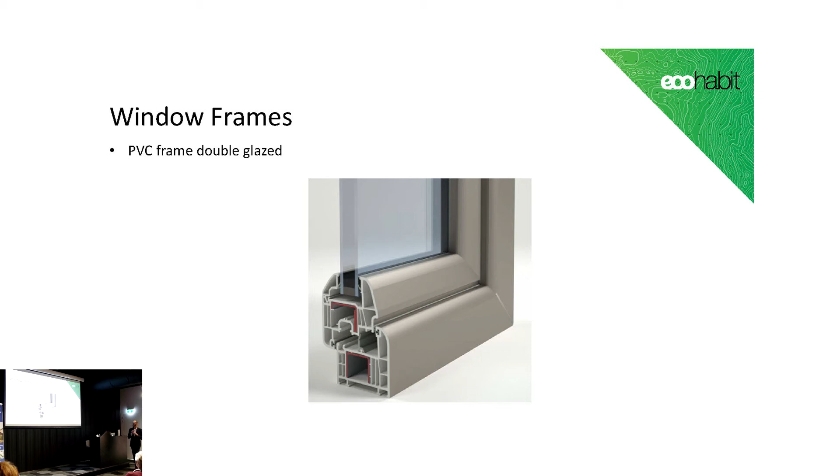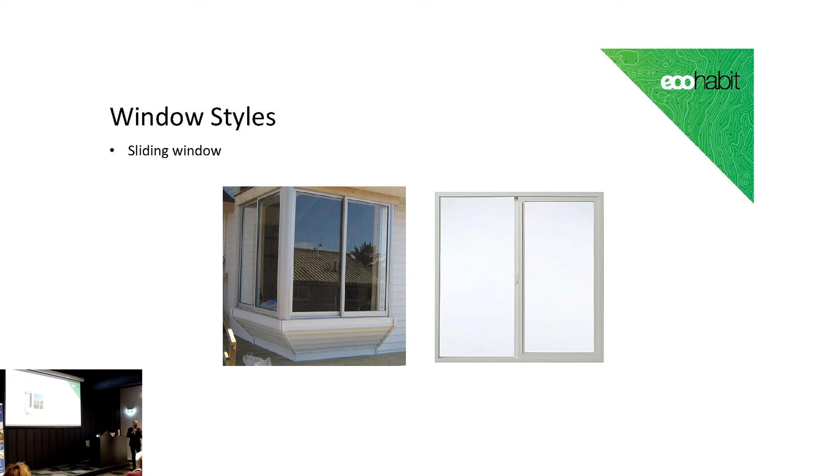So window styles—Sid kind of touched on this as well. Sliding windows, in my mind, are okay, but only half that window is an opening window, so you're not getting the best out of it in terms of crossflow ventilation. Louvers, yep, fantastic for ventilation, but you can't seal them.

Now some companies are coming out with double glazed louvers. I still don't know how well they'll seal, and they certainly won't be as good as a normal double glazed window. Maybe it's an option, I'm not sure. I do love louvers—I grew up living in Narrogin in a sleep out with a louvered sleep out, freezing cold, rattly louvers, which is kind of fun, but probably not the best thing for a performance building.

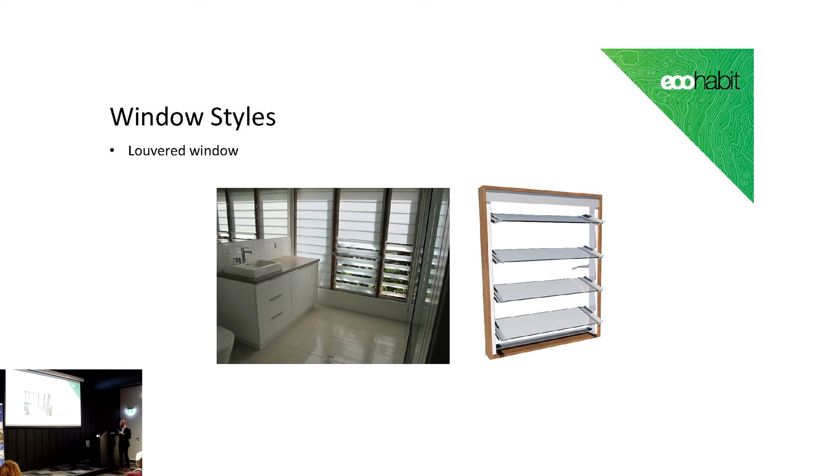Awning windows—now the National Construction Code says that when you calculate the airflow of an awning window, it's the whole area, which I don't get because it only opens this far. But anyway, another flaw in the construction code.

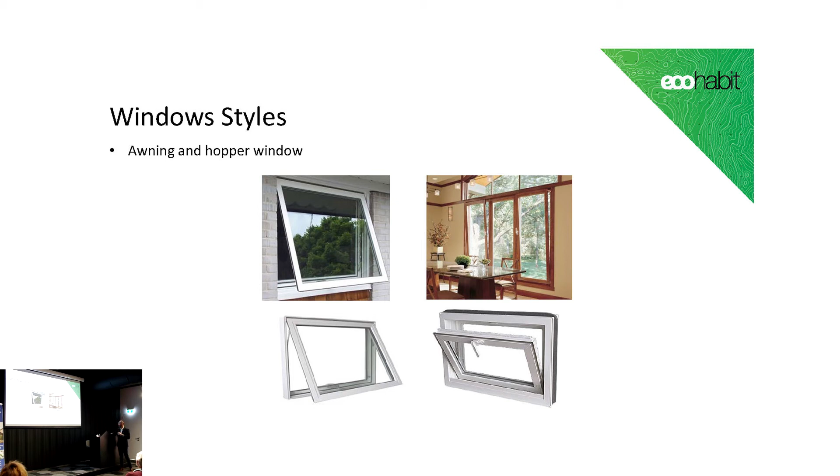They're okay. Double hung windows—we're putting more and more double hung windows into homes now because as you slide them up and down, you get an opening at the bottom and an opening at the top. Helps with crossflow ventilation and circulation through the house. It's kind of cool. But for my mind, casement windows are a no-brainer.

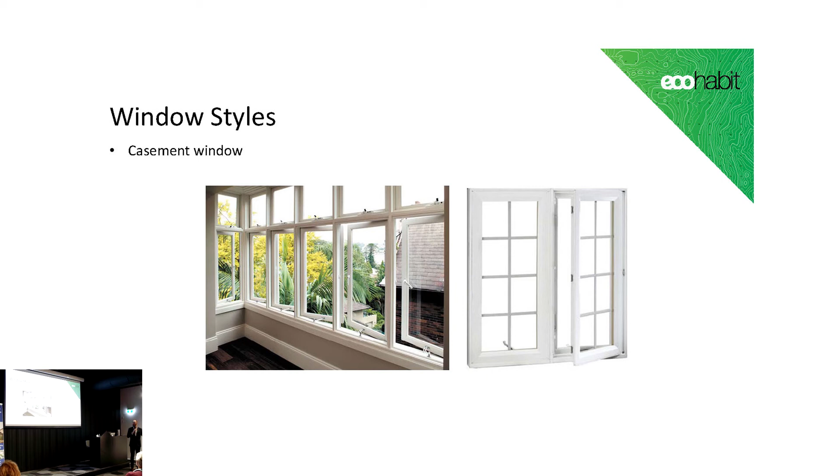As Sid was pointing out as well, a casement window you can open up to 90 degrees. You can maximise the ventilation. You can have a whole bank of casement windows, and the whole wall can open up. But the really cool thing that I love about casement windows...

So if I draw a corner of a room, and let's say I pop a window in here—this is my casement window. This is a plan view of a room, it's opening up that way. When the wind blows across the face of that window, it creates a low pressure, sucks great volumes of air out of your house. So a lot of airflow will happen through suction—a principle called the Bernoulli principle. Google it, look it up. So air passing an opening.

It's like that old trick when you get a straw, blow across the top of the straw, and you stick a piece of paper on the bottom of it—it lifts the piece of paper up. It's the way an aeroplane wing works: airflow across the aeroplane wing creates a low pressure, and the aeroplane lifts up. So it's a very powerful principle to use in the design of windows.

If you Google Bernoulli principle, maybe Bernoulli principle houses, you'll see a lot of this sort of stuff. In Europe, they use chimneys on buildings—airflow coming across the top of the chimney creates the Bernoulli principle, sucking great volumes of air out of the house. So casement windows, in my mind, if you orientate them the right way, with the back to the prevailing wind, you'll get far more airflow through your house than any other type of window.

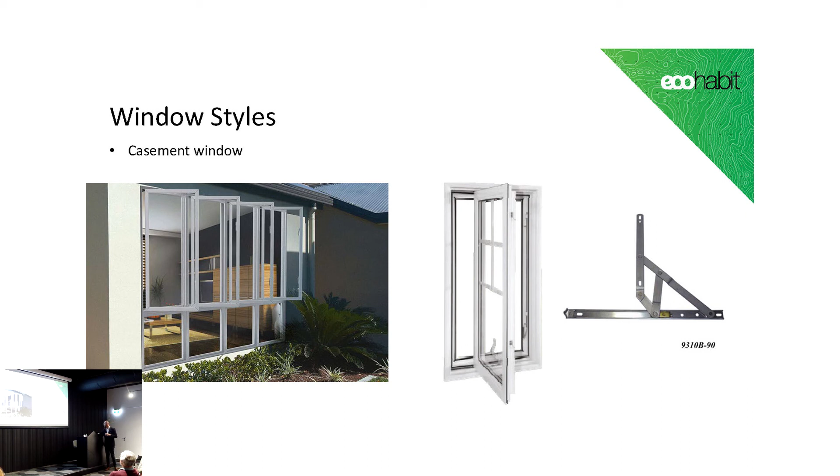European-style tilt and turn windows, we do some passive house designs, so the tilt and turn windows are making their way into our homes more and more often these days. The one thing I'll say about tilt and turn windows is...

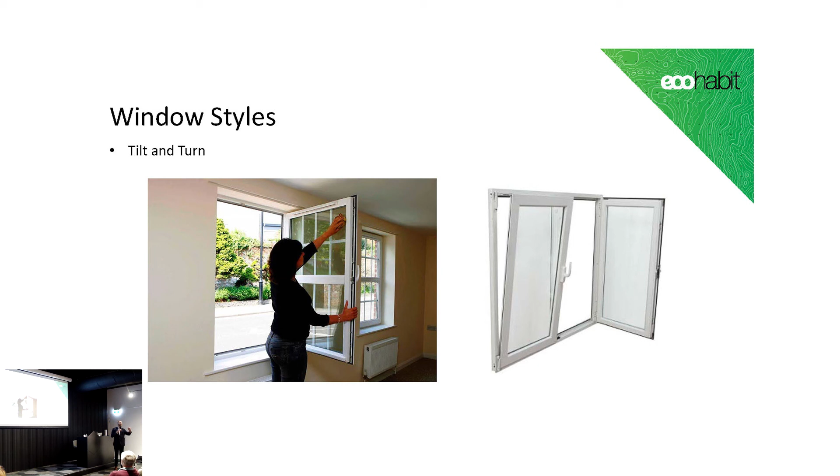Be really careful, they open inwards. Be really careful where you put them, because if you're thinking about putting a dresser or something there, you might not be able to open it. We've been caught out a few times where we've designed the windows the way we thought, and we thought we really explained it to our clients, this is the way your window's opening, and for some reason they didn't quite understand. When the house was built and they went to open their window, they were going, 'Oh, I wanted to put something there,' and the window's going to get in the way. So just be aware that they open inwards. The tilt and turn, you can open them from the top, close it, open them like a casement inwards. So pretty cool.

Fly screens - now this is a real dilemma, because when you put a fly screen on a window, you reduce airflow by maybe up to 50%, depending on the screen. Same with security screens. So you spend all this money having great big casement windows to get good crossflow ventilation, and then as soon as you stick a fly screen or security screen on it, you might actually lose a lot of that benefit. So just think about that.

Also, how are you going to open your windows? If you use a casement or an awning window, bottom left there, you've got the winder. But if you use a casement window with the mechanism I showed before, that's not going to work because your fly screen's on the inside and you're not going to be able to get to the handle and open it up. So there's some challenges there. The tilt and turn windows, that's probably one of the benefits of them, because you can put a security screen on the outside, because they open inwards. Perfect.

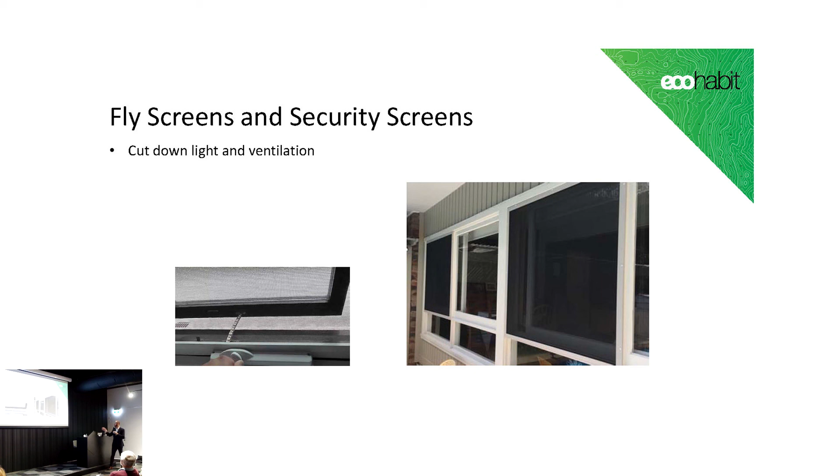Of course, you've got different types of fly screens. You've got these magnetic ones that you can pull off, and you've got the retractable ones. So there's a whole lot of different ones that you can utilise.

I'll just touch on one quick thing, we've got one more minute. When Sid was talking about solar passive design and thermal mass, I'm thinking a little bit differently these days. Both are right, but I'm wondering if the future of housing, with the advancement of solar PV, battery technology, and high efficient materials, is moving in a direction where we build homes a little bit more like an esky. It doesn't mean we have to use it like an esky, just build it like one. Putting solar PV on the roof, we're storing our own energy, we can heat our homes and cool them all day long, and it's all free from the sun.